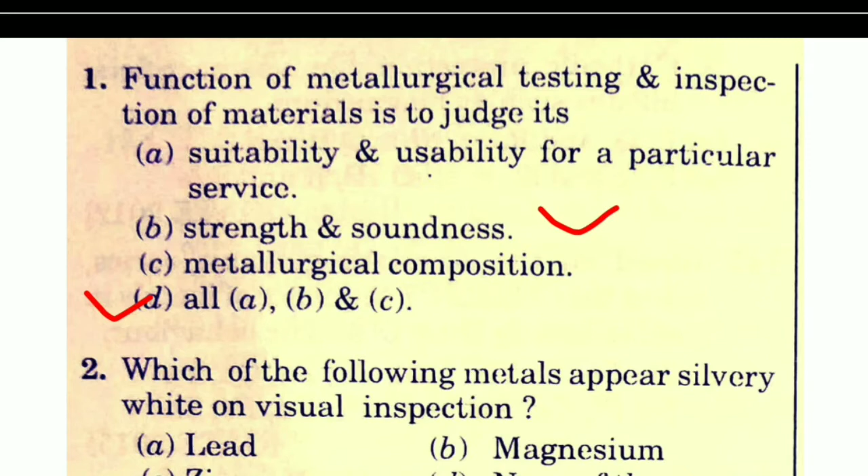नेक्स्ट है, which of the following metals appear silvery white on visual inspection? Lead, magnesium, zinc या none of these? सही आंसर है दोस्तों ऑप्शन बी, मैग्नीशियम। Which of the following metal appear silvery white on visual inspection? सही आंसर है ऑप्शन बी, मैग्नीशियम।

नेक्स्ट है, which of the following metal does not produce ringing sound when it is hammered? एल्यूमिनियम, लीड, मैग्नीशियम या कॉपर? सही आंसर है दोस्तों ऑप्शन बी, लीड। Which of the following metal does not produce ringing sound when it is hammered? सही आंसर है ऑप्शन बी, लीड।

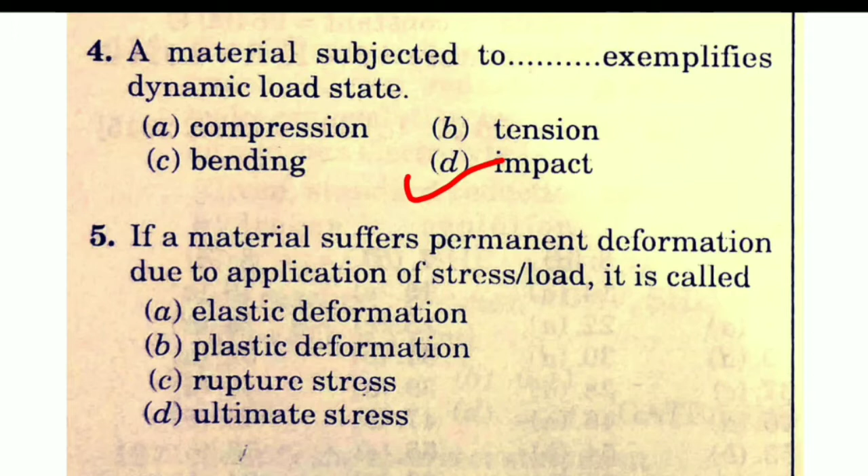नेक्स्ट है, a material subjected to dash exemplify dynamic load state, compression, tension, bending या impact? सही आंसर है दोस्तों ऑप्शन डी, impact। A material subjected to impact exemplifies dynamic load state।

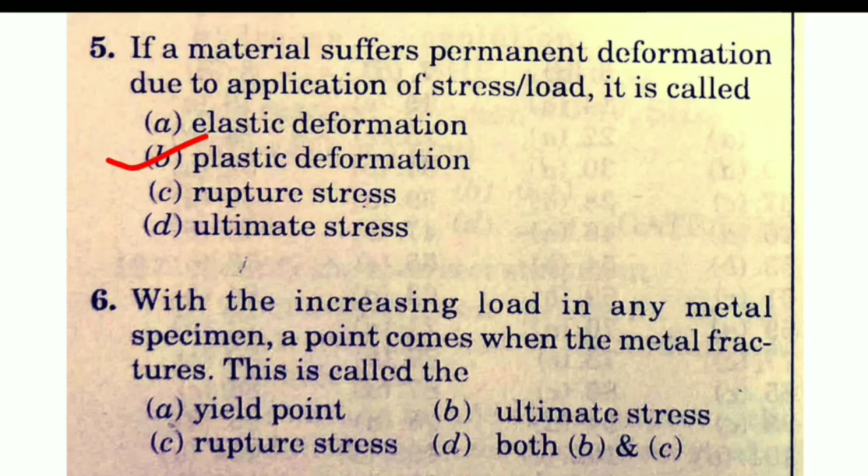Next है, if a material suffer permanent deformation due to application of stress or load, it is called elastic deformation, plastic deformation या rupture stress या ultimate stress? सही आंसर है ऑप्शन बी, plastic deformation। If a material suffer permanent deformation due to application of stress or load, it is called plastic deformation।

Next दोस्तों, with the increasing load in any metal specimen, a point comes when the metal fractures। This is called the yield point, ultimate stress, रफ्चर स्ट्रेस या बोथ बी एंड सी? सही आंसर है दोस्तों ऑप्शन डी, बोथ बी एंड सी, मतलब अल्टीमेट स्ट्रेस एंड रफ्चर स्ट्रेस। With the increasing load in any metal specimen, a point comes when the metal fractures। This is called ultimate stress and rupture stress।

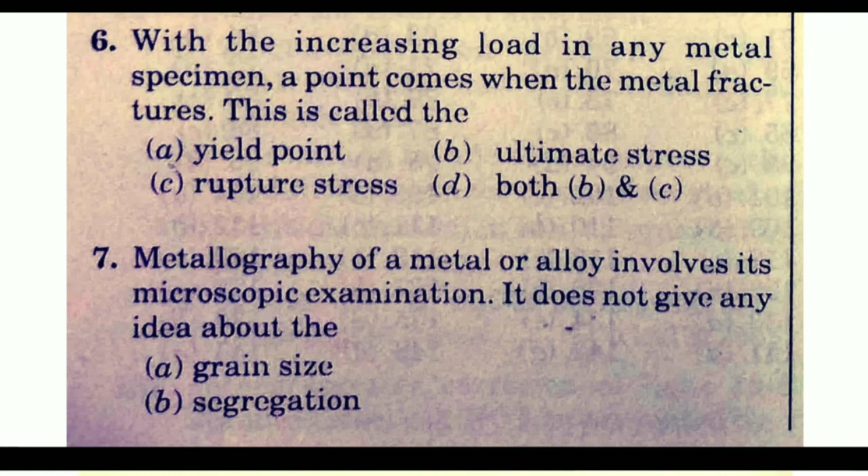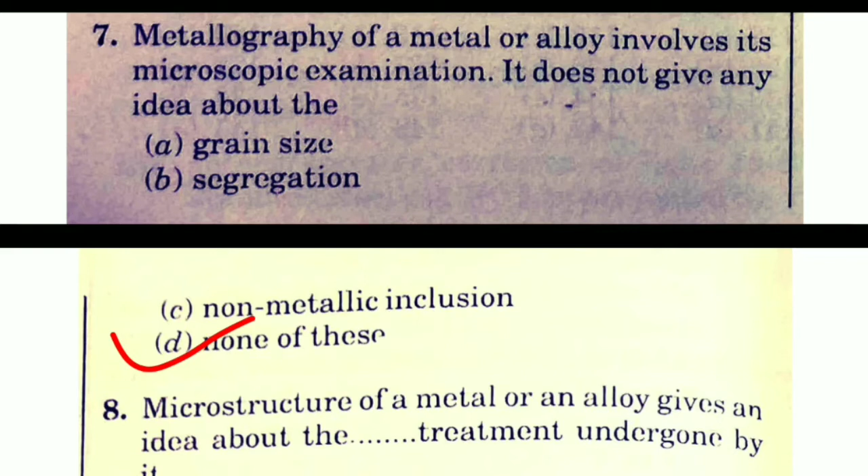नेक्स्ट है, metallography of a metal or alloy involves its microscopic examination। It does not give any idea about grain size, segregation, non-metallic inclusion या none of these? सही आंसर है दोस्तों ऑप्शन डी, none of these। Metallography of a metal or alloy involves its microscopic examination। It does not give any idea about grain size, segregation, non-metallic inclusion। सही आंसर है नॉन ऑफ दिस, ऑप्शन डी।

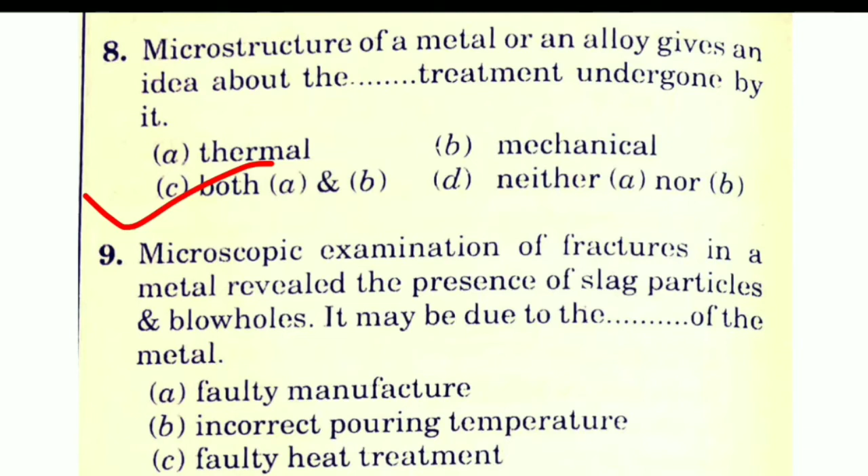नेक्स्ट है, माइक्रो स्ट्रक्चर ऑफ ए मेटल और एन एलॉय गिव एन आइडिया अबाउट द डैश ट्रीटमेंट अंडरगोन बाय इट? थर्मल, मैकेनिकल या बोथ ए एंड बी या नेदर ए नॉर बी? सही आंसर है दोस्तों ऑप्शन सी, बोथ ए एंड बी, मतलब थर्मल एंड मैकेनिकल ट्रीटमेंट। माइक्रो स्ट्रक्चर ऑफ ए मेटल और एन एलॉय गिव्स एन आइडिया अबाउट द थर्मल एंड मैकेनिकल ट्रीटमेंट अंडरगोन बाय इट।

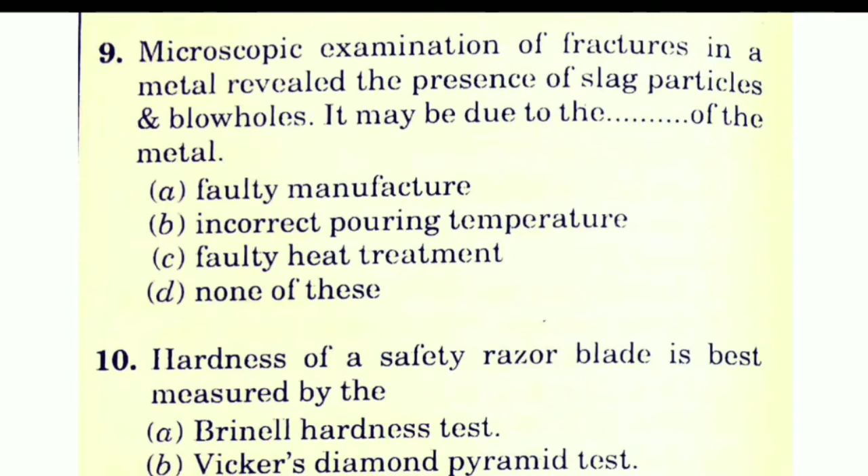नेक्स्ट है, microscopic examination of fracture in a metal revealed the presence of slag particles and blowhole। It may be due to the dash of the metal। Faulty manufacture, incorrect pouring temperature या faulty heat treatment या none of these। सही आंसर है दोस्तों ऑप्शन ए, faulty manufacture। Microscopic examination of fracture in a metal revealed the presence of slag particles and blowholes। It may be due to faulty manufacture of the metals।

Next, hardness of a safety razor blade is best measured by the Brinell hardness test, Vickers diamond pyramid test, या शोर एंड रिबन हार्डनेस टेस्ट, या रॉकवेल सुपरफिशियल हार्डनेस टेस्ट। सही आंसर है ऑप्शन डी, रॉकवेल सुपरफिशियल हार्डनेस टेस्ट।

Hardness of a safety razor blade is best measured by the Rockwell superficial hardness test. Next: plastic deformation in metals is due to the presence of dislocation in crystal. This is a dash defect - point defect, surface defect, line defect, or none of these? Correct answer is option C, line defect. Plastic deformation in metal is due to the presence of dislocation in crystal, which is a line defect.

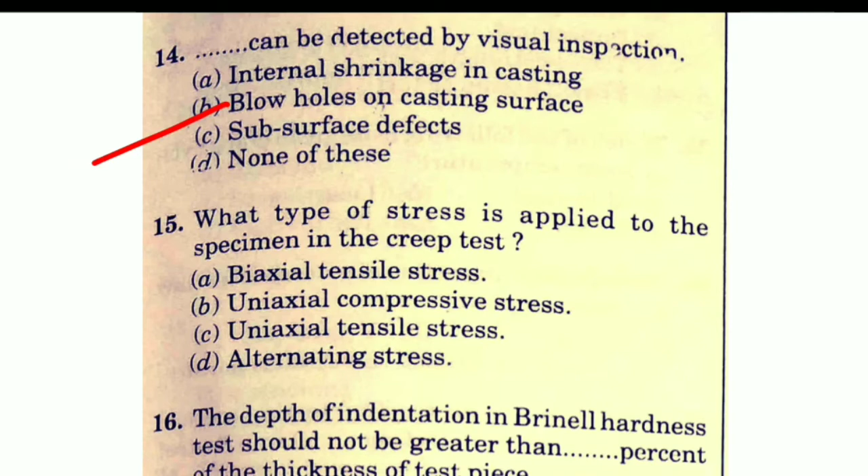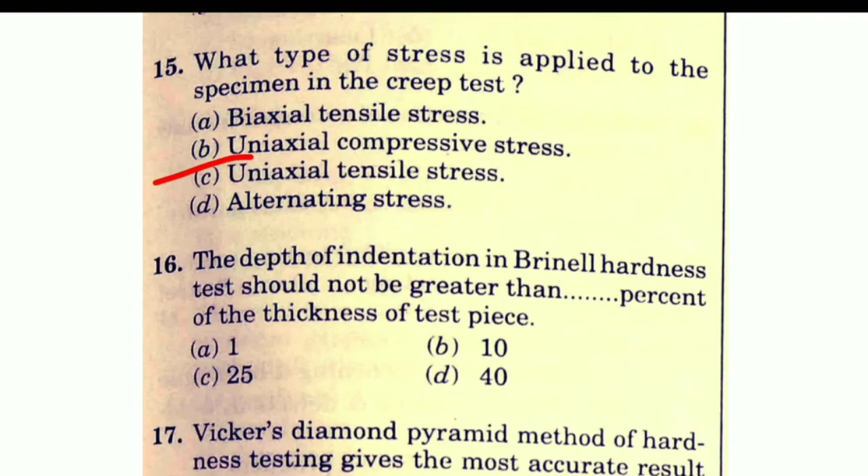What type of stress is applied to the specimen in the creep test - biaxial tensile stress, uniaxial compressive stress, uniaxial tensile stress, or alternating stress? Correct answer is option C, uniaxial tensile stress. What type of stress is applied to the specimen in the creep test? Uniaxial tensile stress. Next: the depth of indentation in Brinell hardness test should not be greater than dash percent.

1%, 10%, 25%, or 40%? Correct answer is option B, 10%. The depth of indentation in Brinell hardness test should not be greater than 10% of the thickness of test piece.

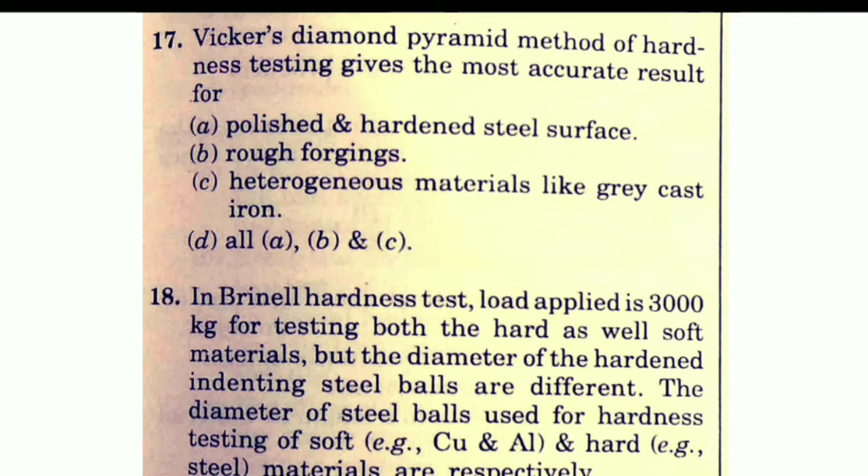Next: Vickers diamond pyramid method of hardness testing gives the most accurate result for polished and hardened steel surface, rough forgings, heterogeneous material like grey cast iron, or D, all of A, B and C? Correct answer is option A, polished and hardened steel surface. Vickers diamond pyramid method of hardness testing gives the most accurate result for polished and hardened steel surface.

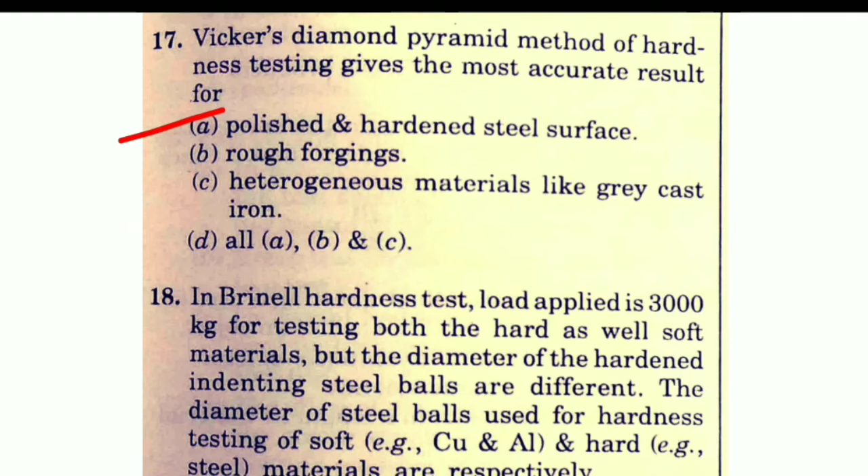Next: in Brinell hardness test, load applied is 3000 kg for testing both the hard as well as soft material, but the diameter of the hardened indenting steel ball are different. The diameter of steel ball used for hardness testing of soft material, for example copper and aluminium, and hard material, that is steel, are respectively dash mm. Correct answer is option A, 5 and 10 mm.

In Brinell hardness test, load applied is 3000 kg for testing both the hard as well as soft materials, but the diameter of the hardened indenting steel ball are different. The diameter of steel ball used for hardness testing of soft, that is copper and aluminium, and hard, that is steel material, are respectively 5 and 10 mm.

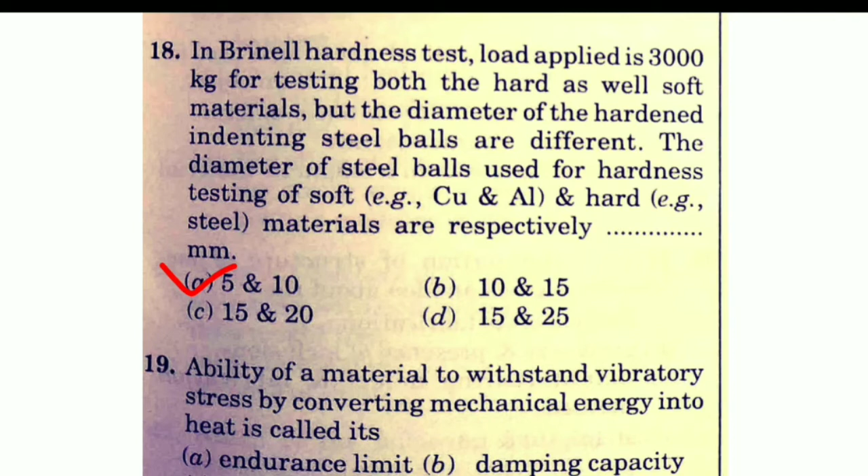Next: ability of a material to withstand vibratory stress by converting mechanical energy into heat is called its endurance limit, damping capacity, toughness, or brittleness? Correct answer is option B, damping capacity. Ability of a material to withstand vibratory stress by converting mechanical energy into heat is called its damping capacity.

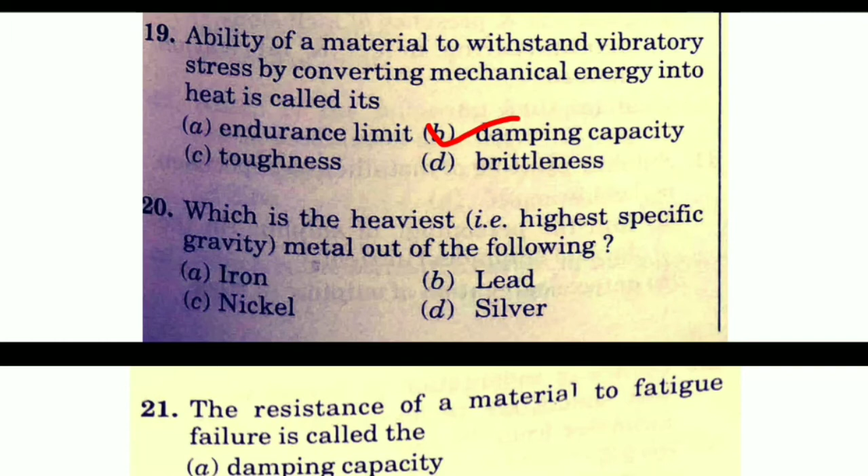Next: which is the heaviest, that is highest specific gravity metal out of the following - iron, lead, nickel, or silver? Correct answer is option B, lead. Which is the heaviest, that is highest specific gravity metal out of the following?

Correct answer is lead. Next: the resistance of a material to fatigue failure is called the damping capacity, endurance limit, toughness, or malleability? Correct answer is option B, endurance limit. The resistance of a material to fatigue failure is called the endurance limit.

Next, pick out the correct statement. Young's modulus of elasticity is dimensionless. The ability of a material to absorb energy when deformed elastically is called its resilience. Factor of safety is expressed as the ratio of working strength to ultimate strength of a material. Tensile strength of a steel wire of cross sectional area less than 1 mm square cannot be determined. Correct answer is option B.

Pick out the correct statement. The ability of a material to absorb energy when deformed elastically is called its resilience.

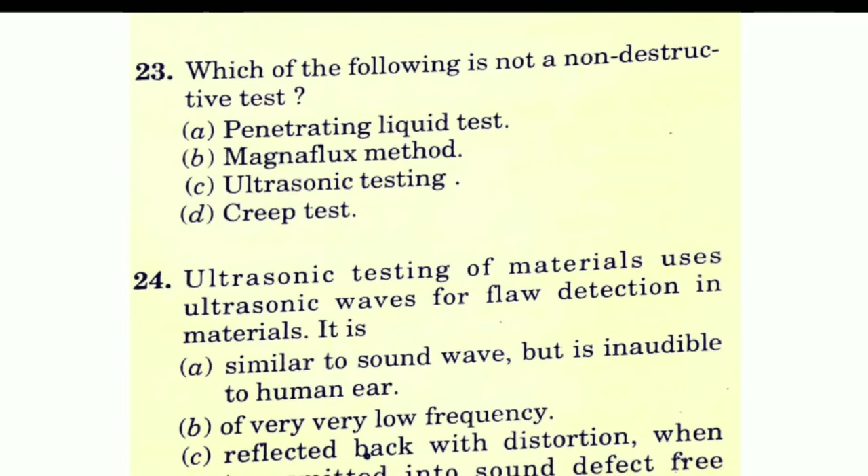Next, which of the following is not a non-destructive test? Penetrating liquid test, Magnaflux method, ultrasonic testing, or creep test? The correct answer is option D, creep test. Which of the following is not a non-destructive test? The correct answer is option D, creep test.

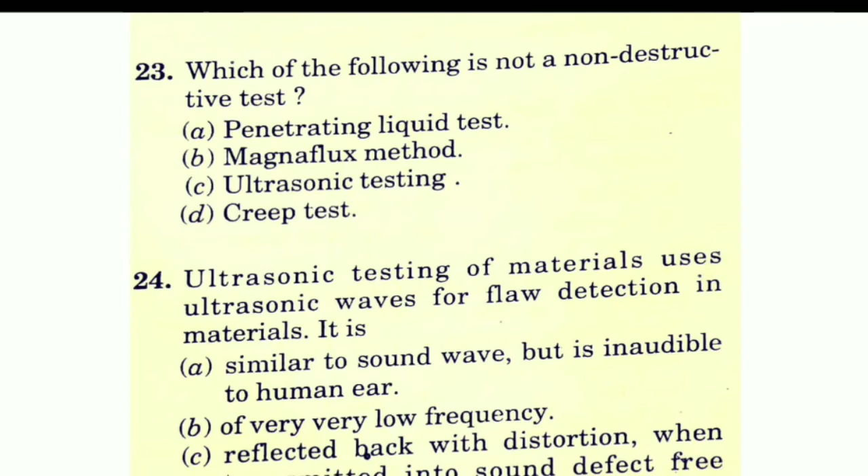Next, ultrasonic testing of a material uses ultrasonic waves for flaw detection in material. It is similar to sound wave but is inaudible to human ear, or of very low frequency, or reflected back with distortion when transmitted into sound defect free materials, or none of these? The correct answer is option A.

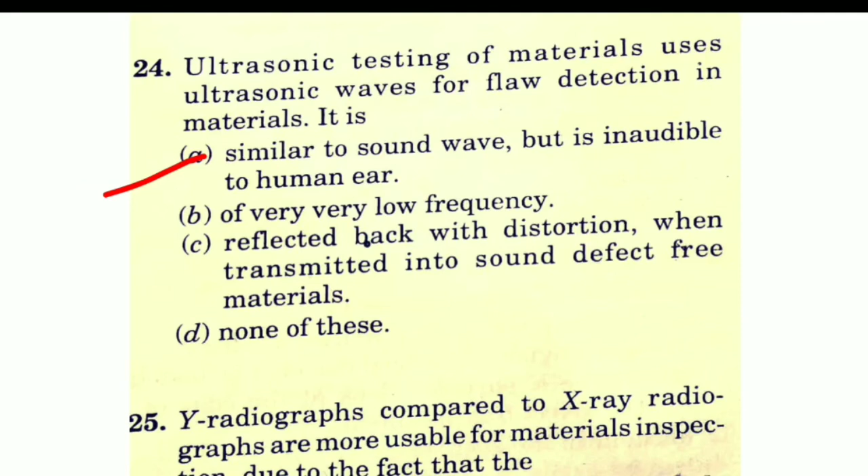Similar to sound wave but inaudible to human ear. Ultrasonic testing of material uses ultrasonic waves for flaw detection in material. It is similar to sound wave but is inaudible to human ear.

Next, why are gamma radiographs compared to X-ray radiographs more usable for material inspection? Due to the fact that X-ray cannot penetrate all materials which are opaque to ordinary light waves. Production of X-ray is much costlier than that of gamma rays. X-ray unit above 300 kV are not portable. None of these. The correct answer is option C, X-ray unit above 300 kV are not portable.

Why gamma radiographs compared to X-ray radiographs are more usable for material inspection, due to the fact that the X-ray unit above 300 kV are not portable.

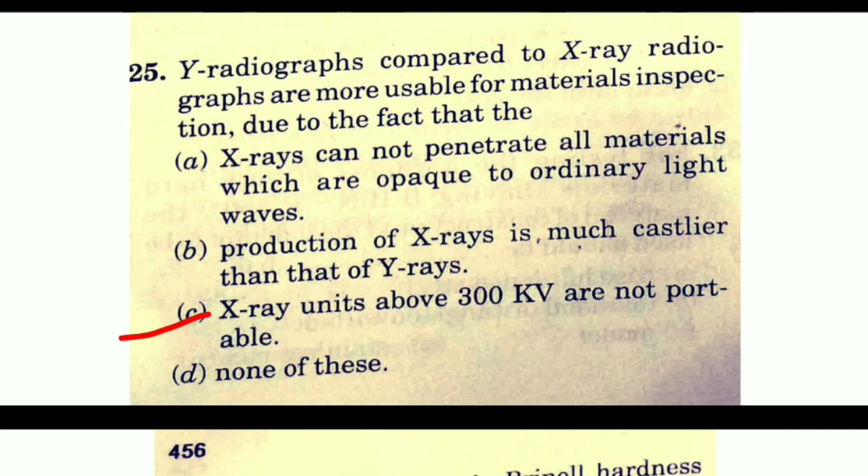Next, center of indentation in Brinell hardness test should not be less than dash times its diameter from the edge of the test piece. The correct answer is option A, 2.5. Center of indentation in Brinell hardness test should not be less than 2.5 times its diameter from the edge of the test piece.

Next, microscopic examination of fracture in a metal revealed the presence of coarse grain. It may be due to the dash of the metal: faulty heat treatment, incorrect pouring temperature, or both A and B, or faulty manufacture. The correct answer is option C, both A and B. Microscopic examination of fracture in a metal reveals the presence of coarse grains. It may be due to the faulty heat treatment and incorrect pouring temperature of the metal.

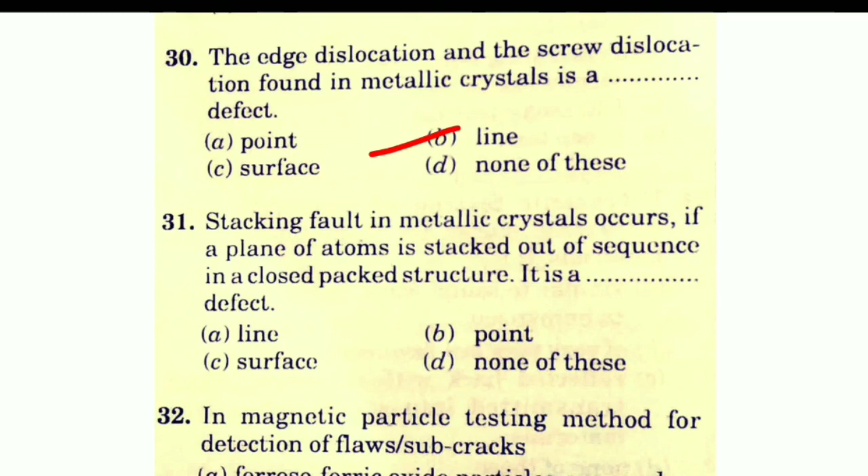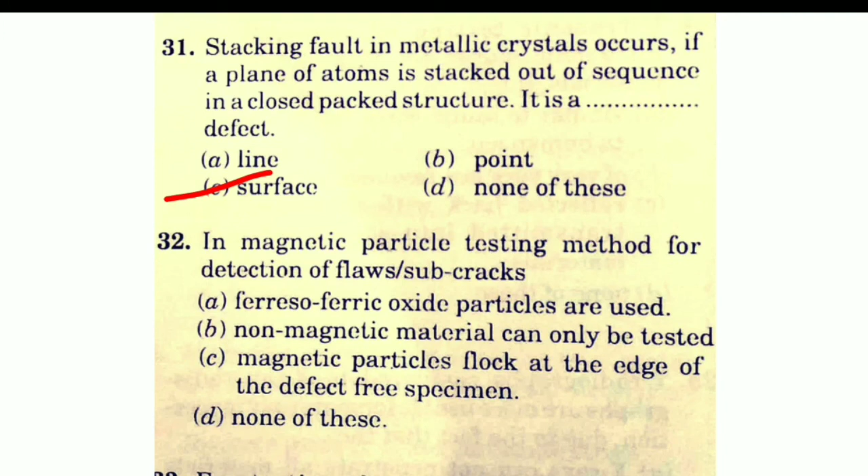Next, stacking fault in metallic crystal occurs if a plane of atoms is stacked out of sequence in a close packed structure. It is a dash defect: line defect, point defect, surface defect, or none of these. The correct answer is option C, surface defect. Stacking fault in metallic crystal occurs if a plane of atoms is stacked out of sequence in a close packed structure. It is a surface defect.

Next, in magnetic particle testing method for detection of flaws or subsurface cracks: ferroso-ferric oxide particles are used, or non-magnetic material can only be tested, or magnetic particles flock at the edge of the defect free specimen, or none of these. The correct answer is option A, ferroso-ferric oxide particles are used.